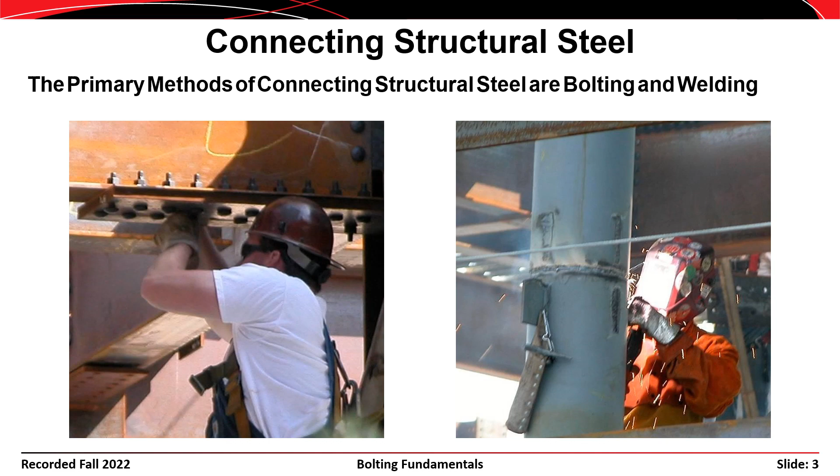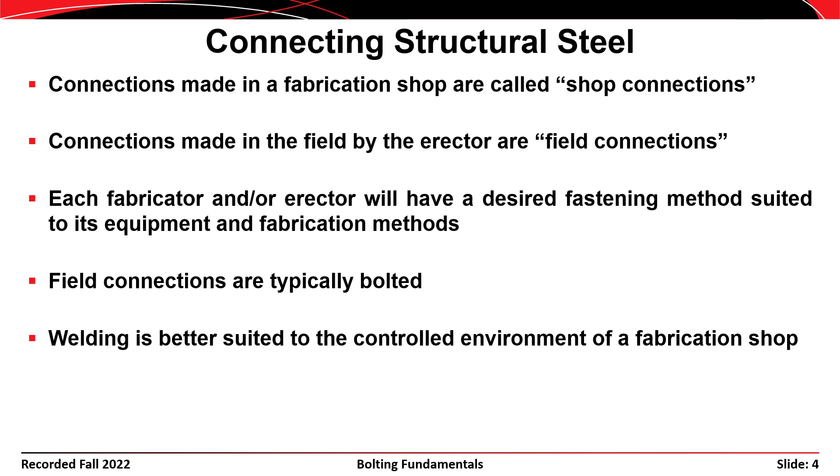Joints and connections made in a fabrication shop are called shop connections, whereas connections and joints made in the field by the erector are called field connections. Each fabricator and erector will have their own preferences for bolting or welding in the field or in the fabrication shop, but generally speaking, field connections are typically bolted and shop connections are often welded.

That's not to say you can't do it the other way around. In fact, welding is sometimes used in the field where bolting is either impractical or undesirable, and sometimes fabricators will do bolting in the shop even if welding is easier in that location.

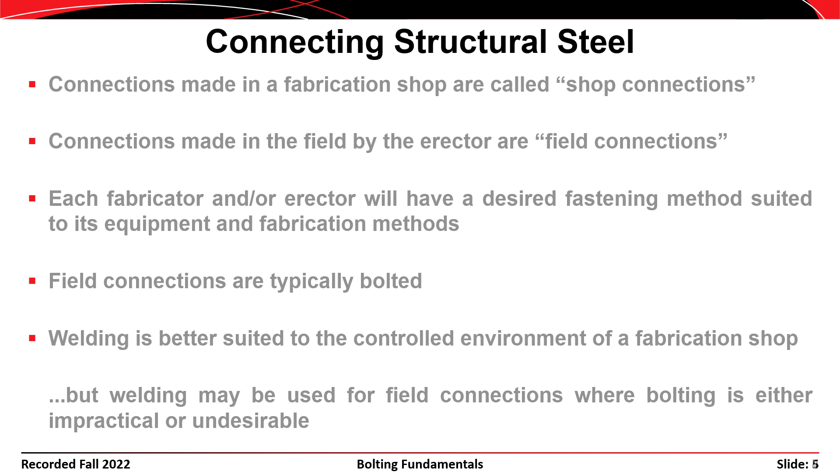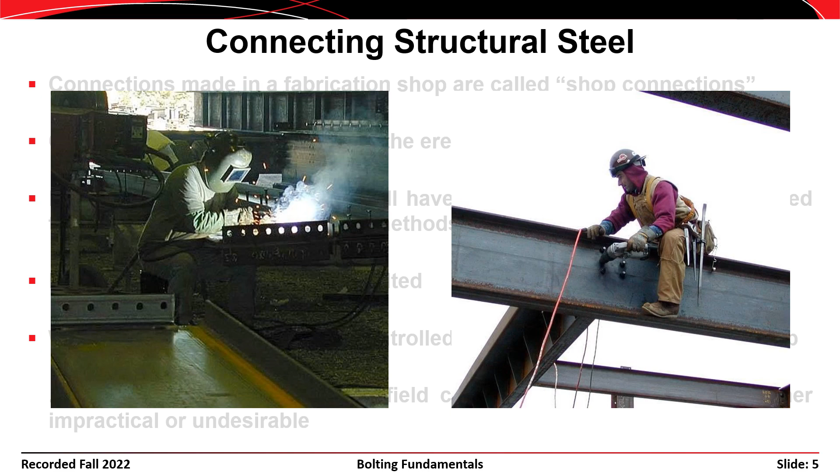As I said at the beginning, this presentation covers bolting, basically the installation of bolts and when and where washers are required and that sort of thing. Welding is covered in a separate presentation, and even failure modes associated with bolting are covered in a different presentation as well.

We're going to refer to the AISC specification, Chapter J, where appropriate, but there's a different specification that governs bolts and bolted joints. That's the Research Council on Structural Connections. They have a specification on structural joints using ASTM A325 and A490 bolts. The last edition of it was the 2014 edition.

It's included in your manual. There's a newer edition due to be released either in 2021 or 2022, and I'll make reference to that occasionally throughout this presentation.

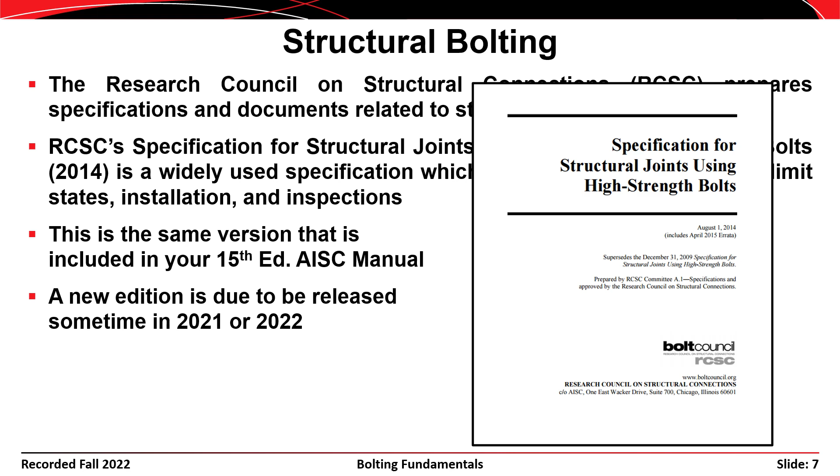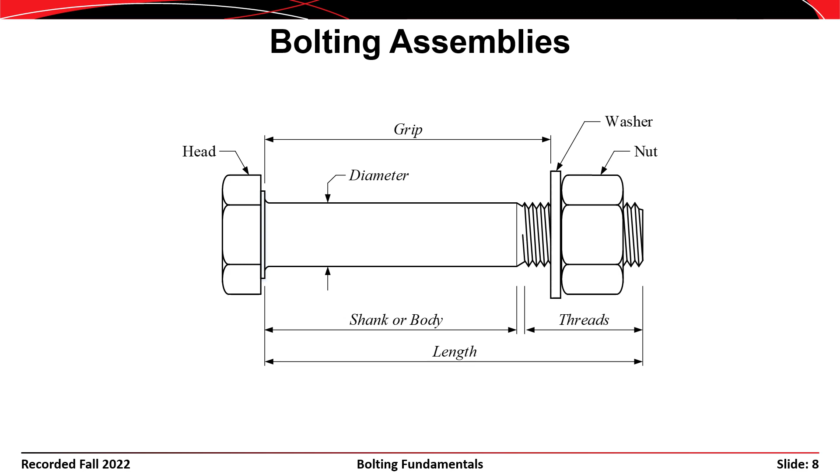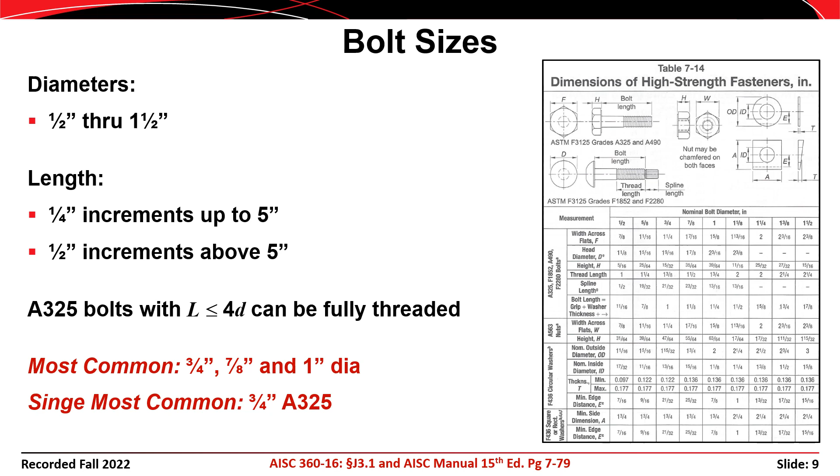If you look at the AISC specification, we have four groups of bolts available. The first is A307, commonly referred to as a low carbon steel bolt, with a tensile strength F sub U of 60 KSI. This is not commonly used for joining or connecting primary members, but more commonly used for secondary members or non-structural work like connecting railings and things of that nature.

We have group A bolts with a strength of F sub U equal to 120 KSI. We have group B bolts with a strength of 150 KSI, and finally group C bolts with a strength of 200 KSI.

Group A bolts are composed of F3125, grade A325, or grade F1852 bolts. These are the most common bolts used in building construction. Group B bolts are ASTM F3125, grade A490, or grade F2280. These are slightly less common, stronger, but cost just a little bit more.

The third group, Group C bolts, have a tensile strength of 200 KSI. They're relatively new to the construction industry in the U.S., and in theory they're available in larger diameters of an inch, inch and an eighth, and inch and a quarter, but currently they're not available in the United States.

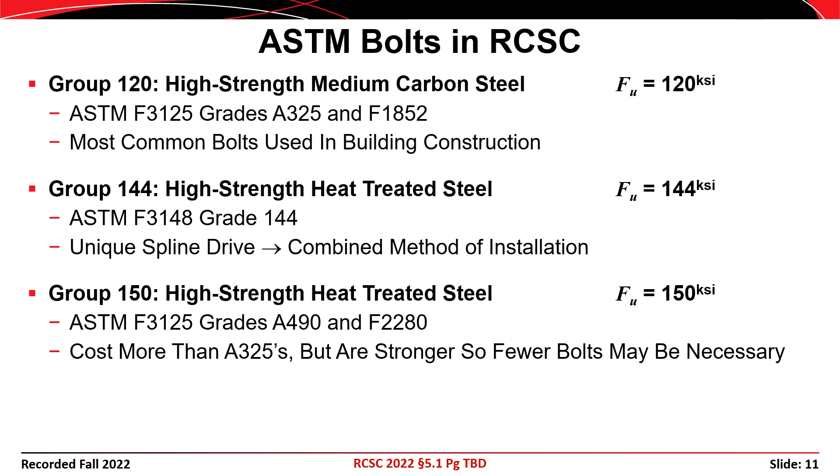If you look at the RCSC specification, the grouping of fasteners is a little different. We have Group 120 bolts instead of Group A bolts, but they're still composed of F3125 grade A325 and grade F1852. We have the Group 150 fasteners as well, composed of ASTM F3125 grade A490 or grade F2280 bolts. But there's another grade included in RCSC: Group 144 bolts, which are ASTM F3148 grade 144. They have a unique spline drive on the end and allow for the combined method of installation.

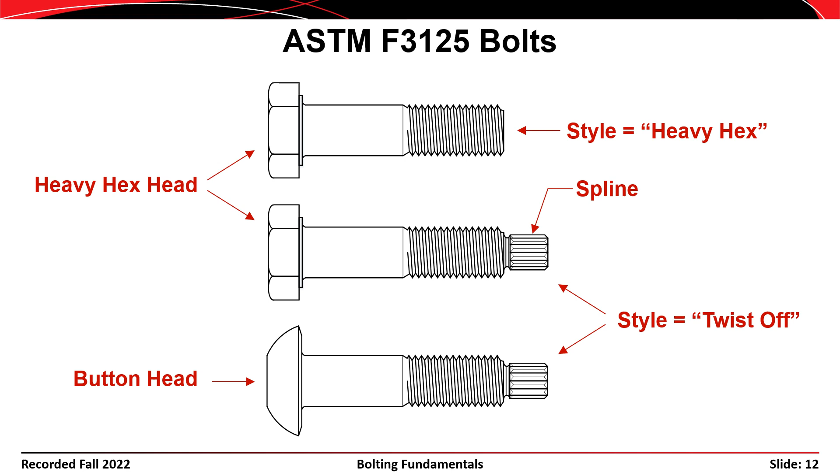The ASTM F3125 specification comes with 6 different grades of fasteners. There's the grade A325, a hex variety at 120 KSI, and the F1852, the twist-off or tension control variety of the 120 KSI bolt. For 150 KSI fasteners, the A490 is the heavy hex, and grade F2280 is the twist-off version. There are also 2 metric grades: grade A325M with tensile strength of 830 megapascals, and grade A490M with tensile strength of 1040 megapascals. Metric bolts aren't used very much in the United States though.

So these are referred to as T and A 144, or torque and angle bolts, at 144 KSI strength. The method of installation is a combined method where a special wrench grips the spline and turns the nut relative to it, achieving a snug tight condition using torque, and then a fully tensioned condition by rotating the nut an additional angle, hence the name torque and angle.

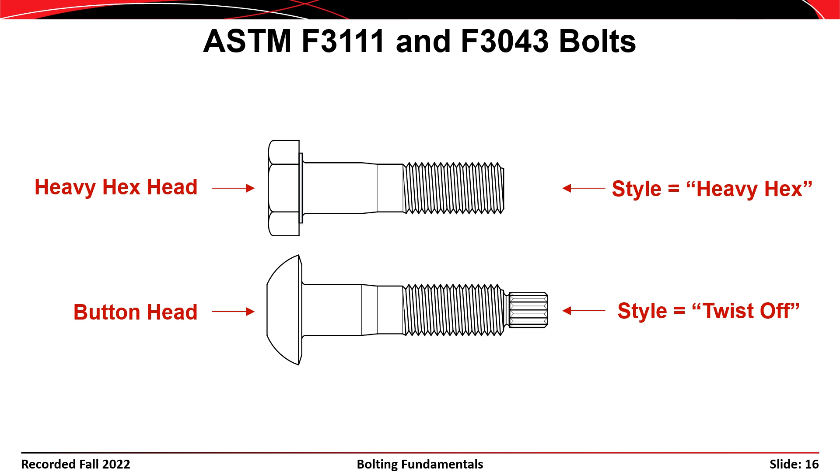These are the 200 KSI bolts, featuring a heavy hex variety, the F3111, and a twist-off variety, the F3043. You might also notice these bolts include a reduced shank that helps them achieve the higher strength without issues with lack of ductility.

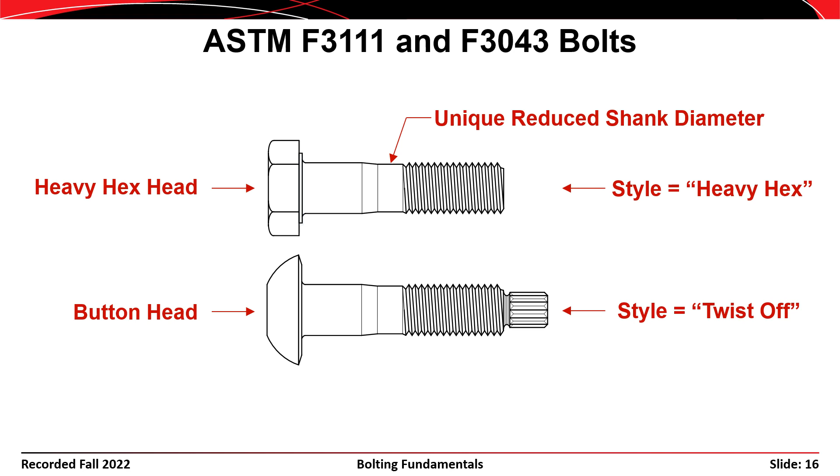These fasteners have a strength of 200 KSI. ASTM F3111 refers to the heavy hex style, and F3043 refers to the twist-off style. However, these bolts aren't available in the United States as of right now.

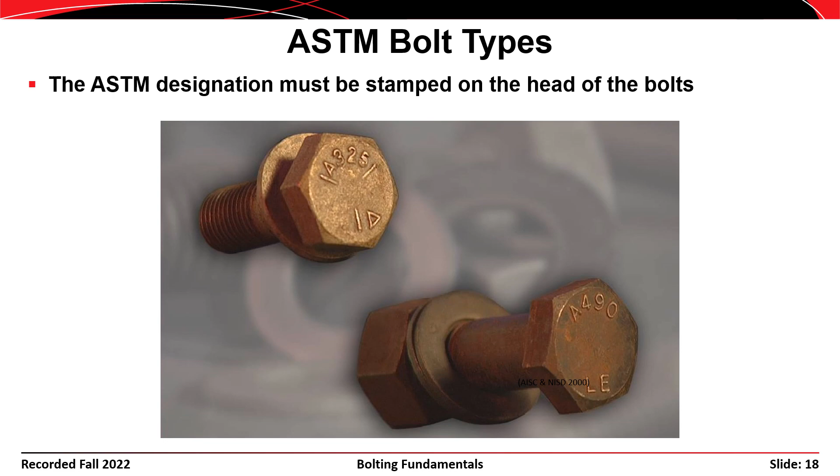Okay, in addition to the different types of fasteners, you can also look at different finishes that you have for the bolts. You can have a plain or galvanized. There are some other coatings as well, like a Dacromet coating and things of that nature. It's considered to be acceptable right now to galvanize A325s or F1852 bolts. I think it's going to be okay to galvanize Group 144 fasteners, but right now it's problematic to do galvanizing of A490s or F2280 bolts.

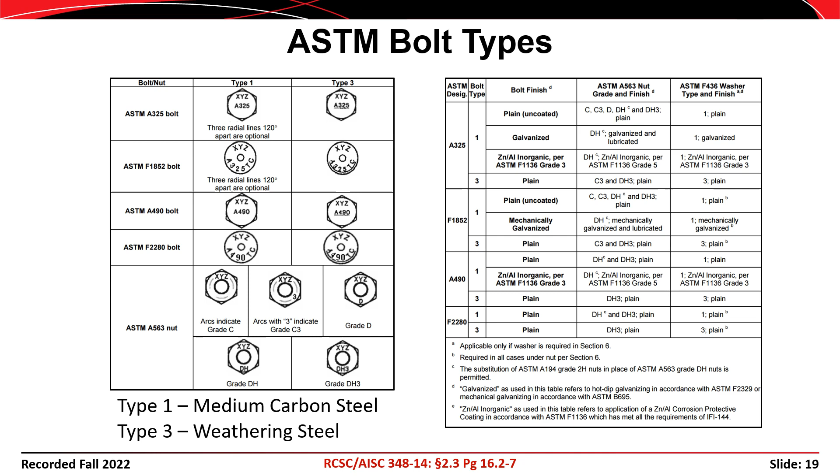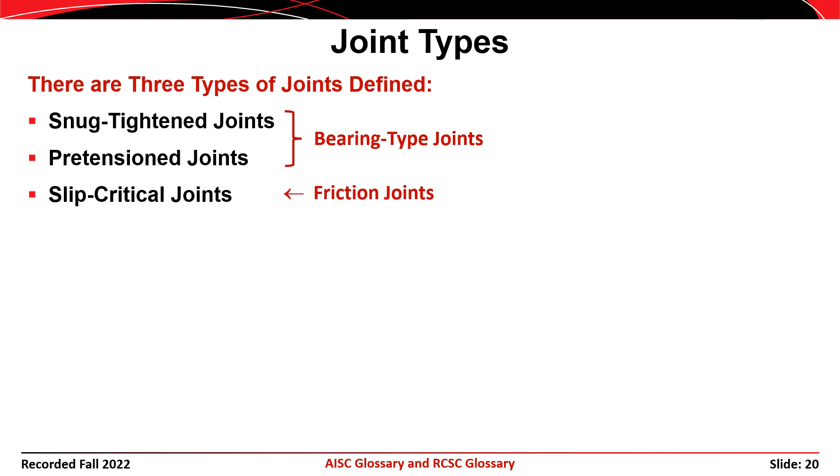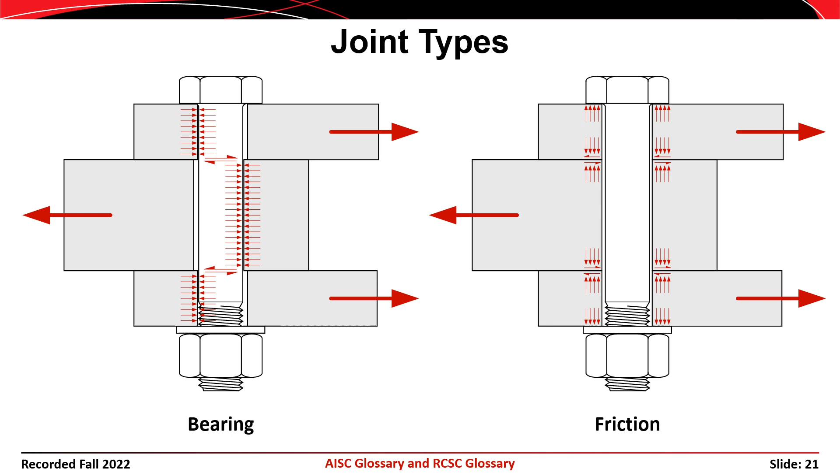Bearing type joints are defined more formally as a snug tightened or pretension joint with bolts that transfer shear loads and for which the design criteria are based upon the shear strength of the bolts and the bearing strength of the connected materials. Failure modes that one would consider for a bearing type joint include bolt tension or shear, bearing and tear out, block shear, tension, compression, or shear failures of the connecting elements, and similar types of failure modes.

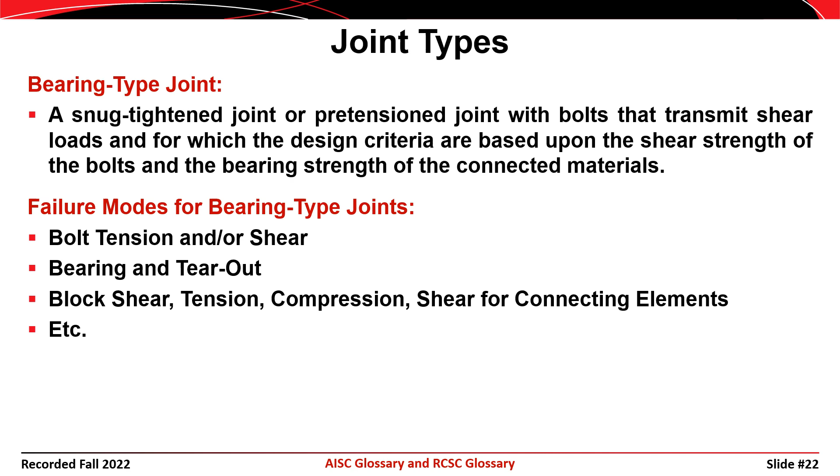A snug tightened joint is a joint designed as a bearing joint in which the bolting assemblies have been installed to the snug tight condition. The slip resistance of a snug tightened joint is basically expected to be 0. A pretension joint is a joint designed as a bearing joint in which the bolting assemblies have been installed to the fully tensioned condition. However, the slip strength of the joint need not be greater than the factored required strength of the joint.

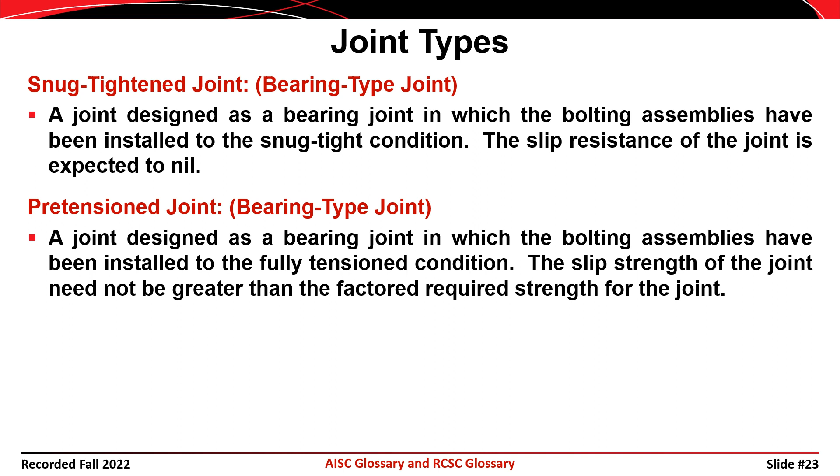In this case, the slip resistance of the joint is there basically as a serviceability issue for the joint or for the connection or for the structure. A slip critical joint is a joint that has been designed to transfer shear loads through friction. The slip strength of the joint must be greater than the factored required strength for the joint.

Washers are part of bolting assemblies, and they're used basically to distribute the force or the stress from the bolt over a larger area of the base metal. They also help to reduce gouging of the softer base metal during the tightening process, and they're in place sometimes to cover an oversized or slotted hole.

If you were to just take a nut or a bolt and tighten it directly against the softer A36 or A572 grade 50 base metal, you would end up gouging that material, and the bolt or nut material would end up galling the base metal. So to prevent that, you put a hardened washer in between them. The washers are a higher strength steel, but it's really the hardness of the washer that matters, because it prevents the bolting assembly components from digging into the base metal.

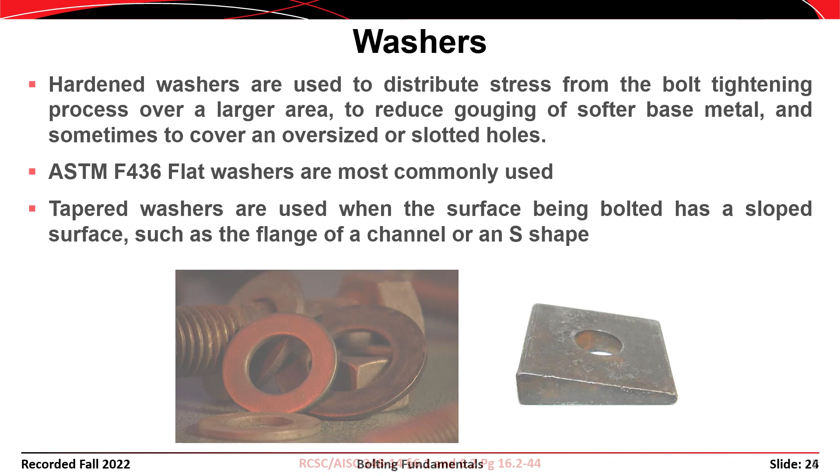Where and when washers are required can be a bit confusing, and you'll find some disparity between the RCSC specification and the AISC specification. In general, you want to put a washer under the turned element during the tightening process. So if the head is held and the nut is turned, you want a washer under the nut. If the nut is held but the head is turned, you want a washer under the head of the assembly.

More specifically, washers are required under both the head and the nut of A490 assemblies when used with base metal that has a strength less than 40 KSI. If you're using an F2280 assembly, you need a washer only under the nut. Remember, the A490 is a hex or heavy hex style, and the F2280 is the tension control or twist-off style bolt. Both of those are 150 KSI.

Washers are required under the head and nut of all F3111 assemblies, and required under the nut only for F3043 assemblies. Remember, the F3111 and F3043 assemblies are 200 KSI bolts. The F3111 is the heavy hex style, and the F3043 is the twist-off style.

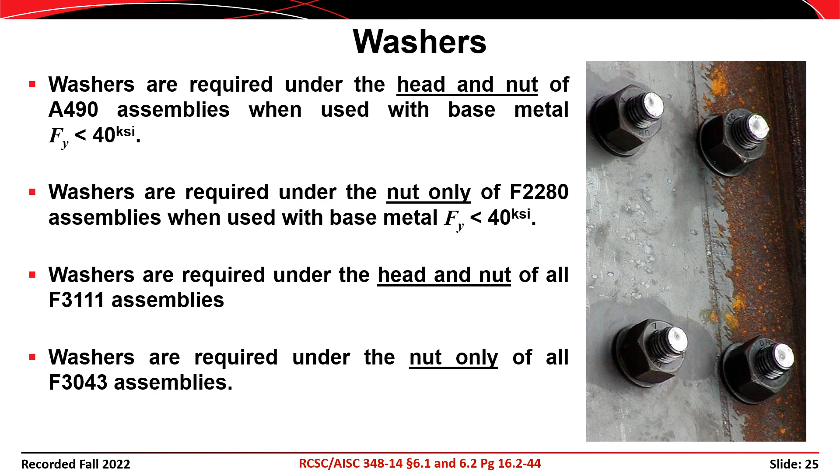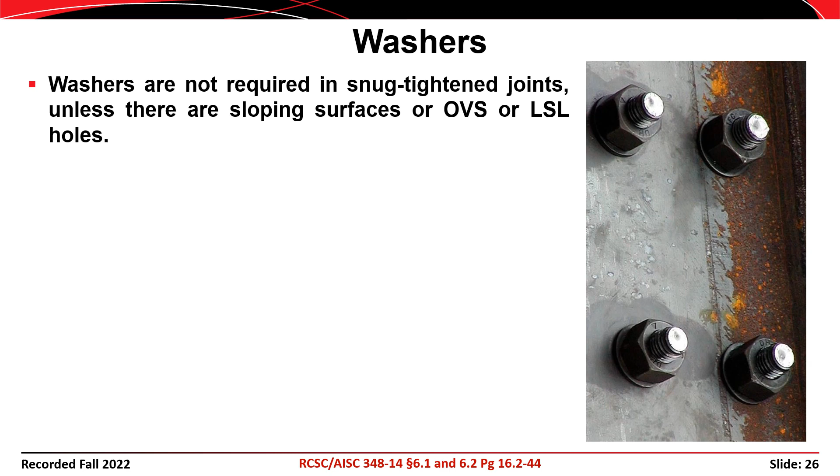Washers are not required when you have snug tightened joints, unless there are sloping surfaces where you'd use a tapered washer, or unless there's an oversize or long slotted hole. In that case, you need to provide a washer to cover the opening in the hole that might not be covered by the nut. We also have washers that are often required in pretensioned or slip critical joints, depending on the method of pretensioning.

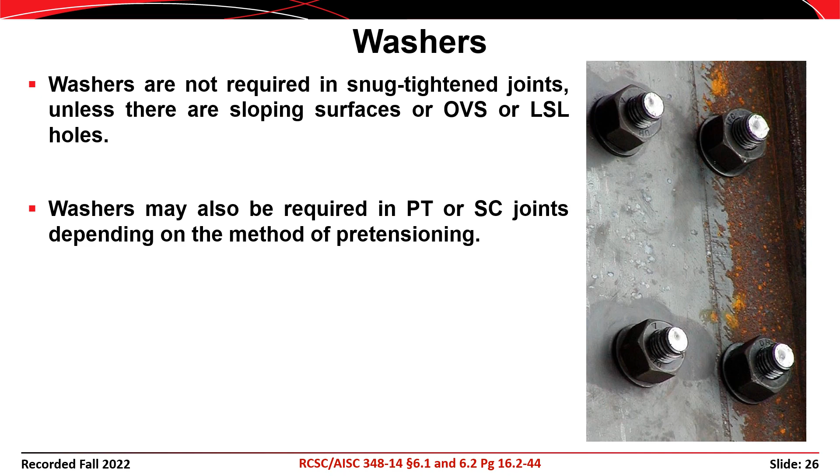Let's talk for a minute about the erection of steel structures and the implications it has on bolting. During hoisting, connectors - meaning the people actually doing the connecting - will install a minimum of 2 bolts per connection, and the remaining bolts are installed and tensioned usually later on after the structure is plumbed.

So you have a raising gang of the erection crew, and they'll come in with the crane and use that to set members, putting at least 2 bolts in. In theory they're required to put washers and nuts on those bolts, and at least snug them up before they release the crane. Then they usually have a different bolting crew that comes in afterward to put the remaining bolts in, and if pretensioning is required, to actually do that pretensioning.

This is an interesting case. There have been several failures in the United States because connectors or the raising gang don't put in enough bolts during the erection process. In fact, there was a post office failure in Chicago where a beam fell from a building under construction, and it was found that the raising gang put 2 bolts in but didn't put nuts on some of those bolts, which led to the failure.

In another case here in Cincinnati, there was a failure during construction of the downtown casino. As I understand it, that failure resulted because they poured a concrete slab on top of a beam before the bolting crew came in and installed all the bolts in the connections supporting that beam, which was supporting the concrete slab. So they got the order of operations mixed up, and it led to a failure.

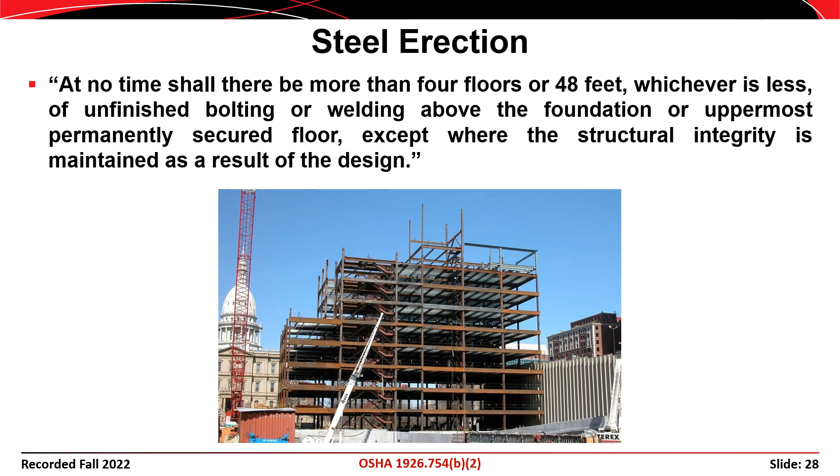Bolts on a typical steel job site are installed either to the snug tight condition or to the fully tensioned condition. Bolts are permitted to be installed only to snug tight when used in bearing type connections, or when you have group A bolts used in joints subjected to tension or combined shear and tension, where loosening or fatigue due to vibrations or load fluctuations are not a consideration.

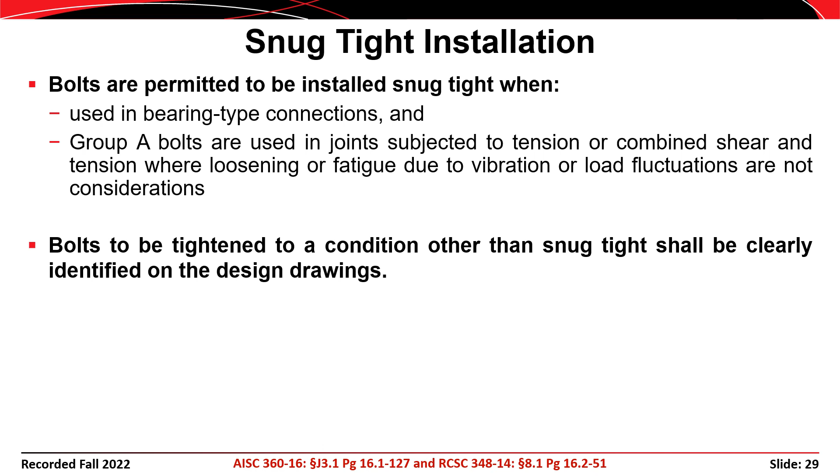Bolts to be tightened to a condition other than snug tight have to be clearly identified on the design drawings. So if nothing is called out on the design drawings, it's assumed by the contractor that those bolts will only be snug tight.

AISC 2016 says that the snug tight condition is defined in the RCSC specification. And if we go to the RCSC specification, it says that the snug tight condition is the tightness attained with a few impacts of an impact wrench, or the full effort of an iron worker using an ordinary spud wrench to bring the plies into firm contact.

It's interesting because the definition of snug tight is one of those things that seems to change every time there's a new issue or release of the specifications, but this has generally been the case for quite a while - basically the full effort of an iron worker using an ordinary hand wrench, or the few impacts of an impact wrench. The problem with this is that not all iron workers are created equal.

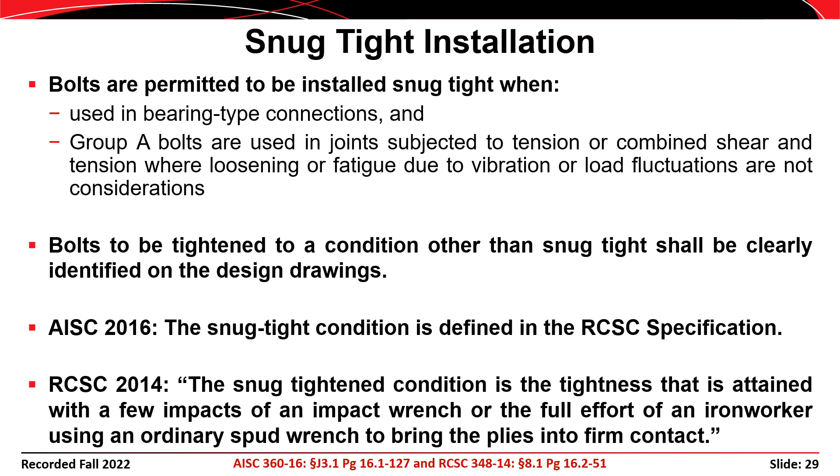So defining the full effort of an iron worker with an ordinary wrench, in some cases you get a bit more effort from one iron worker than you might from another.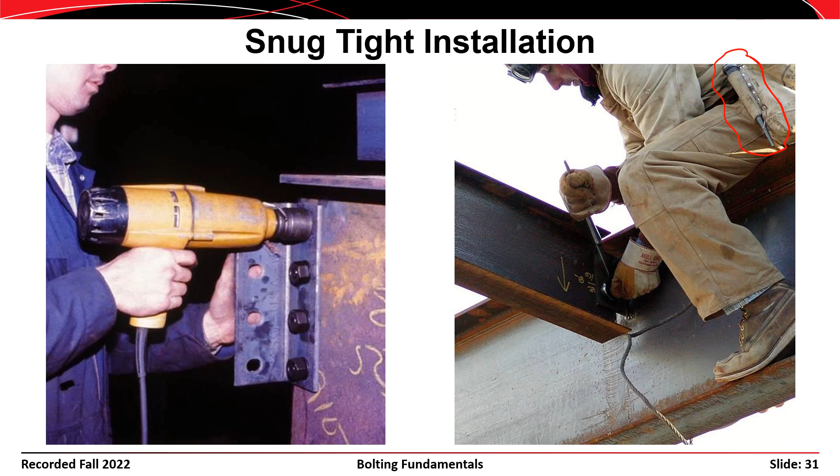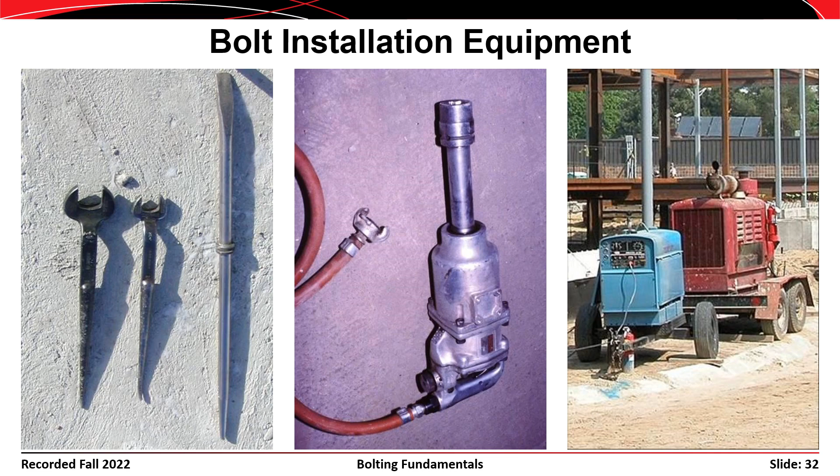You have the 120 KSI bolts group A, the 150 KSI group B bolts, and then the 200 KSI group C bolts. So the minimum pretension is basically 70% of the tensile strength of the bolts, but it's the tensile strength calculated using the effective area of the fastener and not the gross area of the fastener - so there's a little bit of magic in the calculations, if you will.

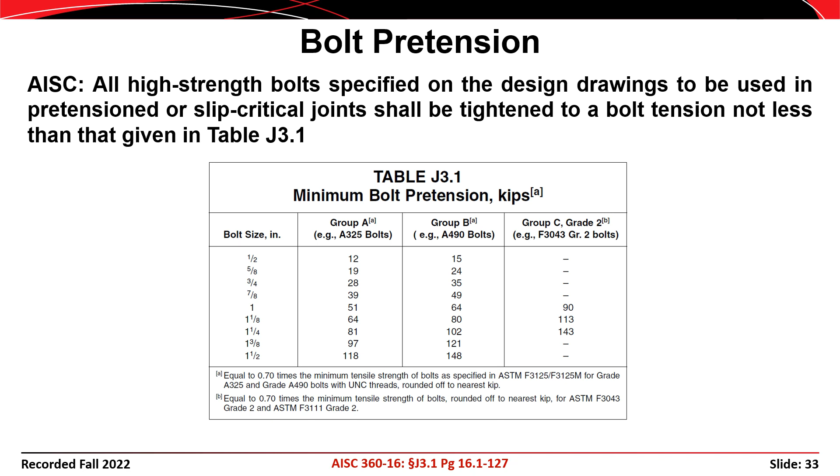Grade 144 bolts, the torque and angle fasteners, have the same minimum specified pretension as the A490s or F2280s. RCSC doesn't include the F3111s or F3043s, the 200 KSI bolts.

So in the end, for pretensioned and slip critical connections, we need to provide a minimum pretension in the fasteners. In order to do that, we need to use one of the methods included in the RCSC specification. AISC just provides a reference to RCSC with respect to methods of bolt installation, and it's in Chapter 8 of the RCSC specification.

The methods included are turn of nut pretensioning, calibrated wrench pretensioning, twist off tension control bolt pretensioning, direct tension indicator pretensioning, and coming in the next edition of the specification is a new method called the combined method, where we combine a method of snug tight using a prescribed torque and then a fully tensioned condition using an angle of rotation beyond snug tight.

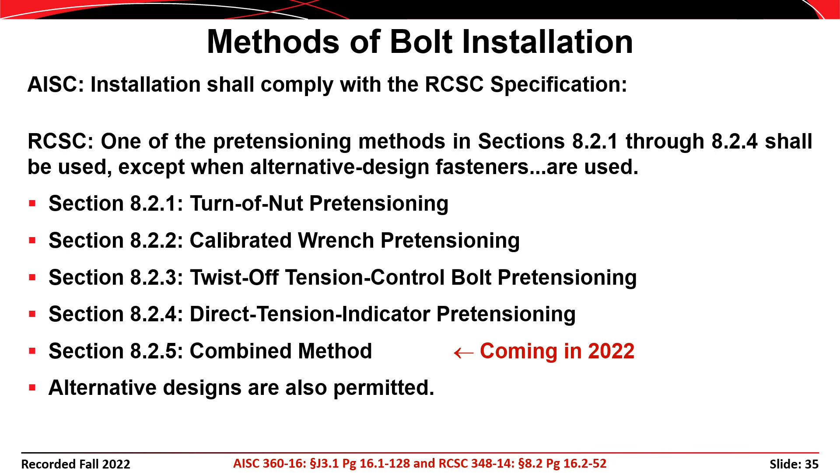There's also a provision for alternative designs, so if you find a fastener that doesn't conform with one of these methods, you're allowed to use it, but there's some prescriptive language that talks about how to make sure you get enough pretension in those alternative bolt designs.

So we'll talk about turn of nut pretensioning first, and the basic premise here is that you rotate the nut of the fastener assembly relative to the bolt, and in so doing you stretch the bolt by some amount, and that change in length of the fastener corresponds to a strain, which then corresponds to a stress, which then corresponds to a force.

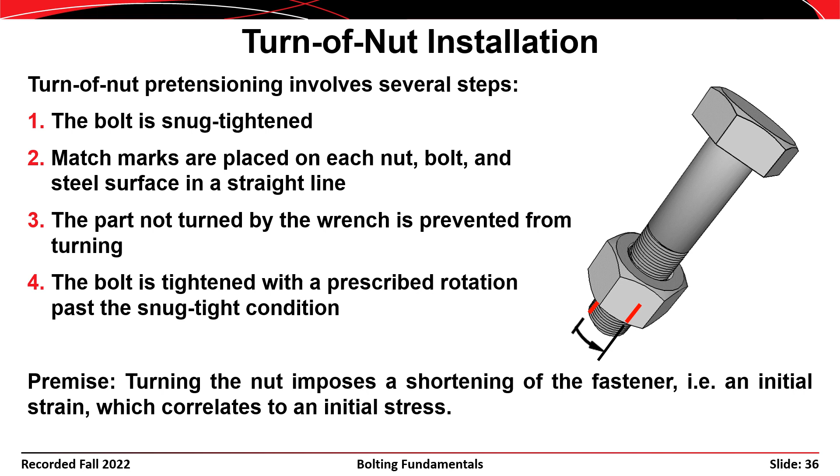So the basic method is that you snug tighten your bolts, then you put a match mark on the nut relative to the bolt, and then you rotate the nut by an additional angle that will shorten the bolt by a length appropriate to get the minimum prescribed tension in that fastener. The illustration on this slide shows the two match marks in red, and then the nut has been rotated by a prescribed angle in order to provide the minimum pretension.

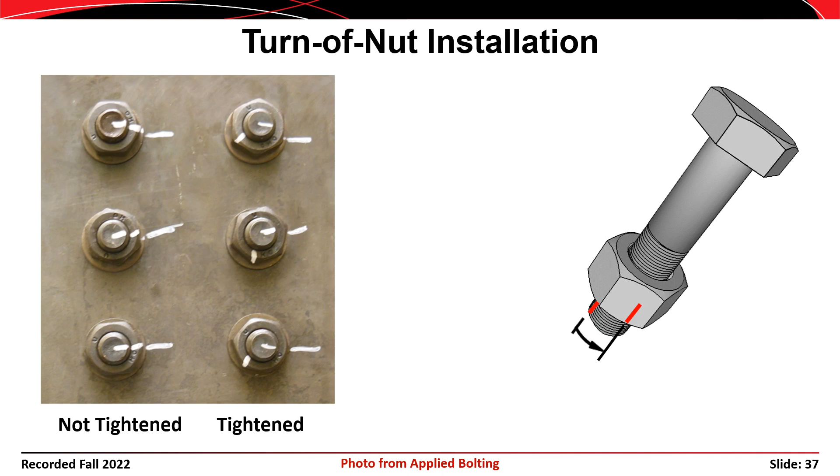For a medium length bolt, it's a half of a turn, and for a longer bolt, it's 2/3 of a turn. And then you have other provisions for the case where the head of the bolt and the nut are being borne against two different surfaces that aren't parallel to each other.

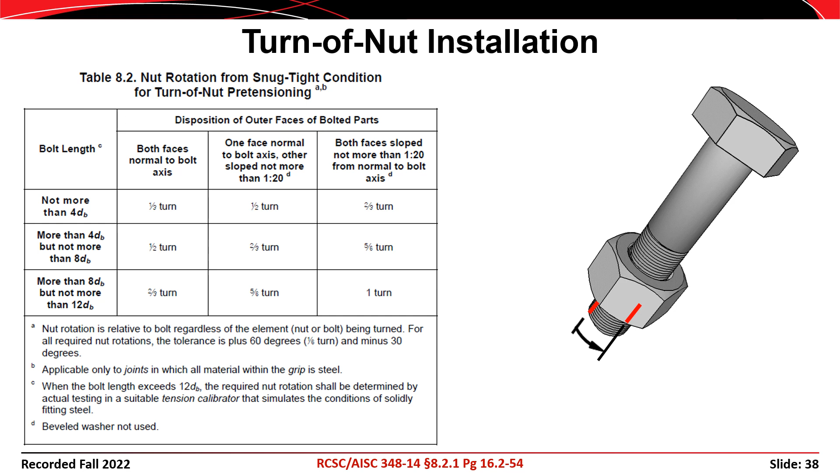So the next method that we'll talk about is the calibrated wrench method, and this is most similar to what you might think about if you're used to working on automobiles where you have a prescribed torque that needs to be applied to a nut, say when installing a valve cover, or maybe installing a tire where you have to provide, say, 30 foot-pounds of torque to the nut.

So this method of installation is based on the idea that there's a relationship between the torque that's applied and the amount of force that's developed in the fastener. And that relationship is shown here, where T, the torque applied to the nut or the bolt, is equal to K times the diameter times the force.

And K is the nut factor, and it depends mostly on whether there's lubrication between the threads of the bolt and the threads of the nut. In a case where you have relatively high lubrication, you end up with a relatively low amount of torque required to get a prescribed force in the bolt. If you have dry threads or threads with high friction, you end up with a higher nut factor and require a larger torque to get to the same force.

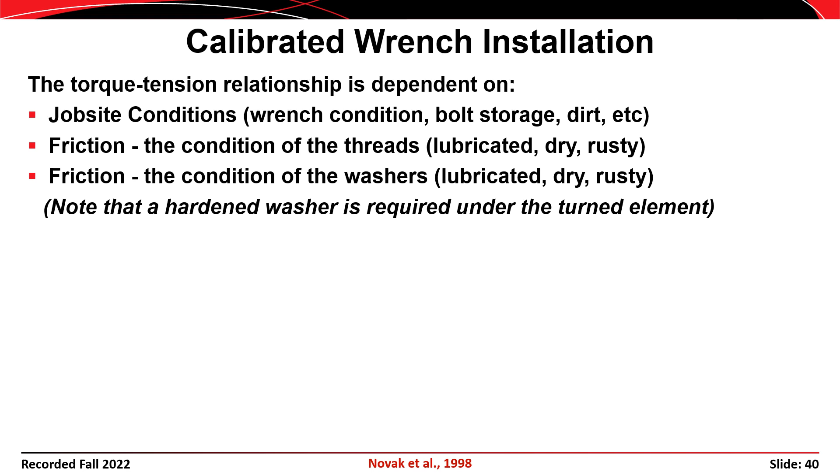The calibrated wrench method is dependent on a lot of the job site conditions. You have to make sure that your wrench is calibrated correctly so that if it says you're reaching a given torque, that you're actually getting that same torque. And you need to make sure that the threads of the fastener assembly are in good condition. You can't leave the bolts out to get rusty or dirty. So friction between the threads affects the installation process, and even friction on the faces of the nut, the head of the bolt, and the washers also affects the installation method.

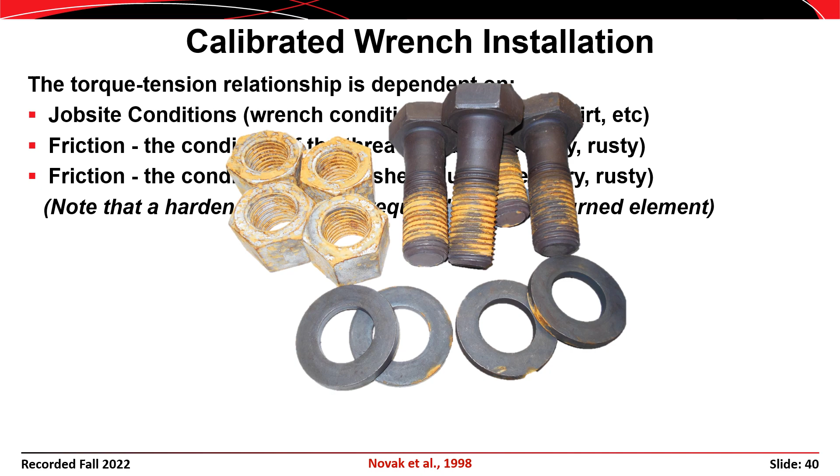This shows an example of bolts that were stored poorly. You have some rust that has developed between the threads of the fastener and on the inside of the nut. This would probably affect the calibrated wrench method quite a bit, and you might not be able to achieve the minimum specified pretensions with fasteners that look like this.

If we look at the nut factors for a 1-inch diameter A490 bolt, taking that bolt directly out of the keg or can that it was shipped in, we had a nut factor of about 0.179. If we apply some stick wax to it, then that nut factor goes to 0.275. The premise there is that the bolt was removed from the keg or package it was shipped in, the lubrication dried off or evaporated, and then we tried to lubricate it again, but we weren't able to get the same nut factor that we got directly out of the package. And if you look at the nut factor for rusty fasteners, it goes all the way up to 0.389. So basically you would need between 2 and 3 times as much torque to get the same pretension in bolts that were rusty compared to bolts coming directly out of the shipping package.

That's illustrated here.

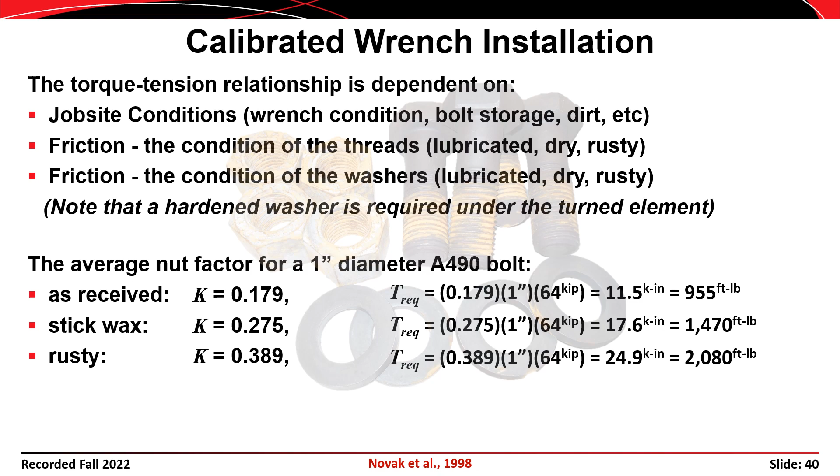The third method we'll talk about is twist-off or tension control bolt installation. Both the F1852s and the F2280s are twist-off tension control bolts. Also, the F3043s are tension control bolts, 200 KSI.

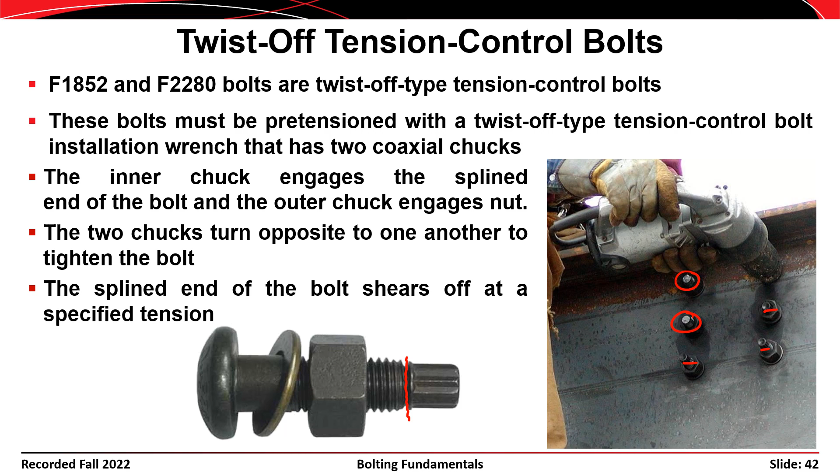Over here on the right, you can see the wrench. These two fasteners here have been twisted off, so you can see the spline is missing. These three fasteners here have not yet been tightened. This illustrates the method that the wrench uses. The wrench has two counter-rotating chucks: the inner chuck that grips the spline, and the outer chuck that grips the nut.

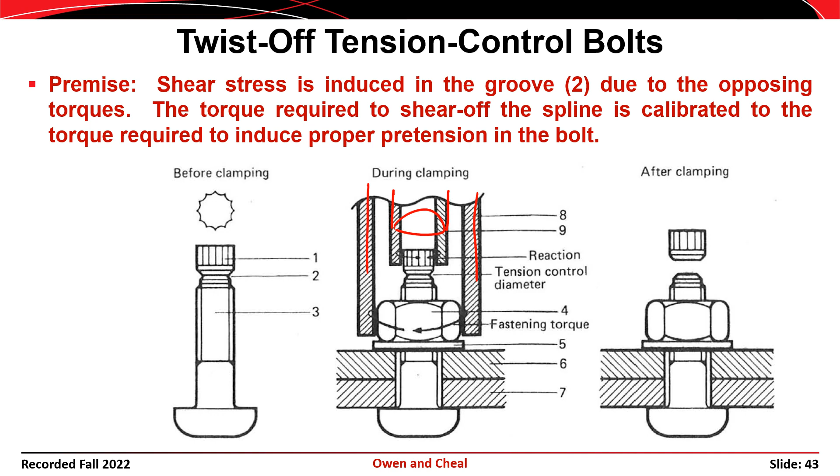Okay, TC bolts are often button-head or round-headed fasteners because they can be tightened from one side. You don't have to have a wrench on the head of the fastener to hold it from rotating.

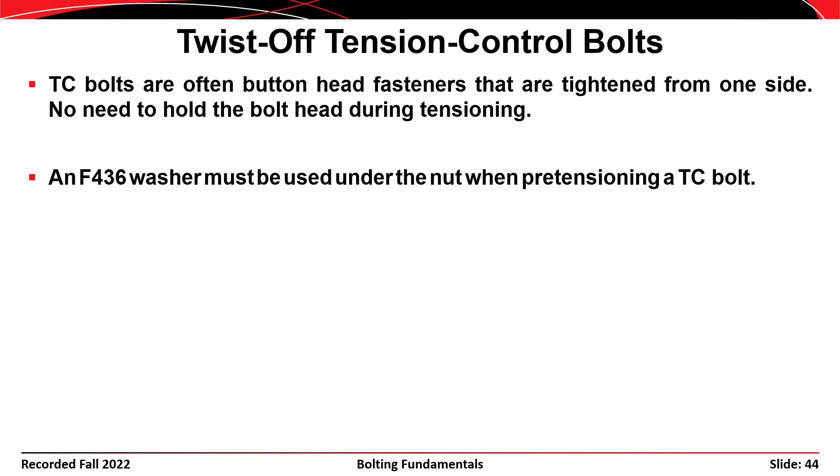An F436 washer has to be used under the nut when pretensioning a TC bolt in order to prevent the nut from gouging into the base material, which would affect the amount of torque going into the assembly.

TC bolts are susceptible to thread condition, so typically they're shipped as assemblies. You have a bolt, nut, and washer shipped together, as opposed to some hex assemblies where you can get the bolt, nut, and washer out of separate packages. I think more or less most fasteners nowadays are shipped as assemblies, but that's not strictly the case.

In some cases it may be necessary to pretension a TC bolt without twisting off the spline. Maybe you can't get a regular tension control wrench on the bolt, so you can still use a conventional wrench or a torque wrench to install the bolt.

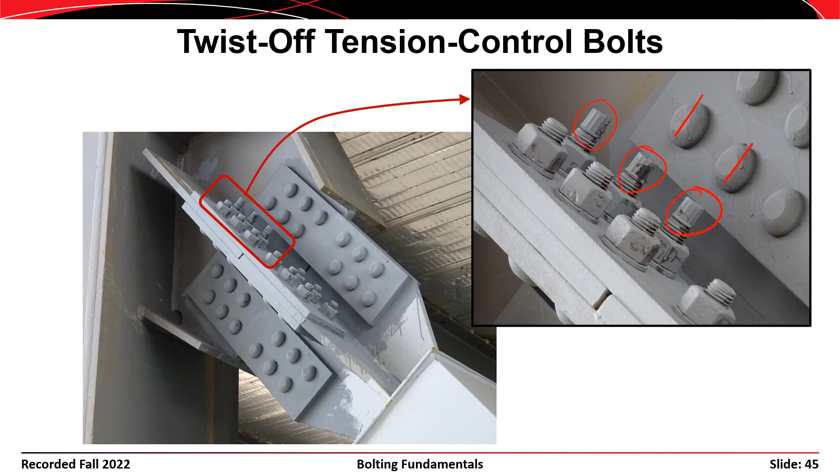Okay, the next method of installation that we'll discuss is a direct tension indicating washer, or DTI, direct tension indicator.

These are washers that conform to ASTM F959, and they basically have protrusions or dimples on the face of the washer. The premise is that as the bolt is tightened, those protrusions will squash out, squish down, or be depressed. When you're no longer able to fit a feeler gauge in between those dimples, the bolt is said to be tight enough so that minimum pretension is achieved.

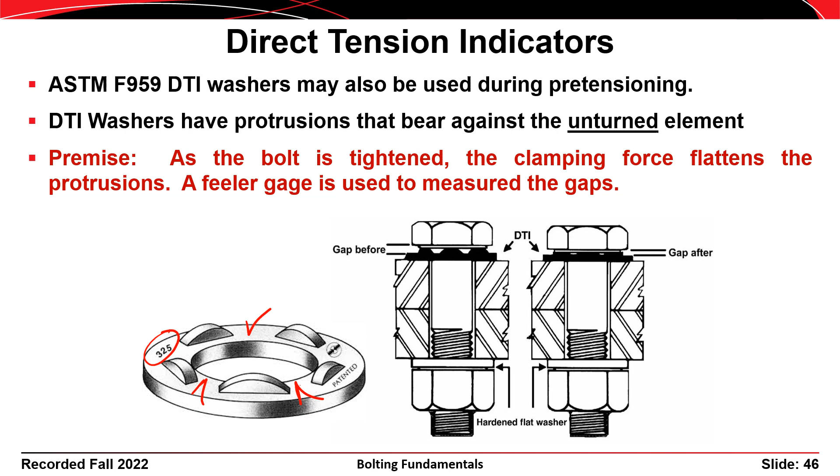Now these washers are calibrated to the specific bolt you're using. You can see this one says A325 on it, so it has a sufficient number of dimples to achieve minimum pretension for an A325 fastener. But you couldn't use that with an A490, for example. So you have to look at the face of the washer to make sure you're using the appropriate washer for the grade of fastener being installed.

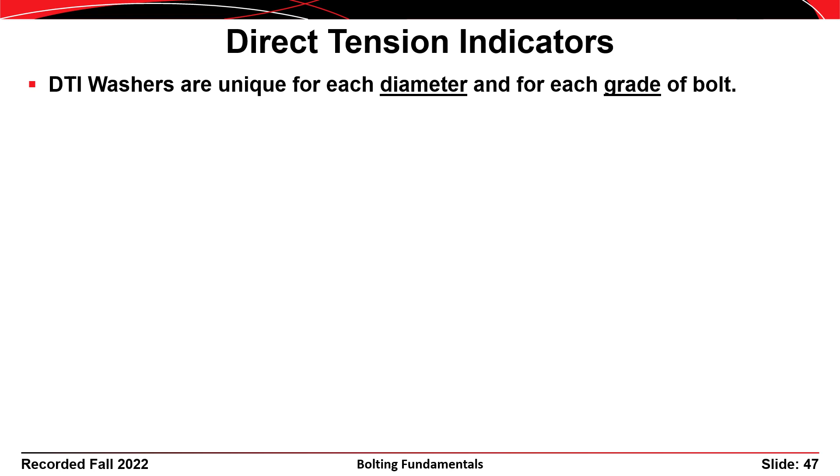The location of the DTI washer with respect to the turned element is critical when installing assemblies using the DTI method. The idea is that you don't want the turned element of the assembly directly adjacent to the protrusions on the direct tension indicator. If you're turning a nut against those protrusions, instead of squishing them down or compressing them, you might actually grind them off, and you might not achieve minimum pretension even though you have a sufficient number of refusals of the feeler gauge.

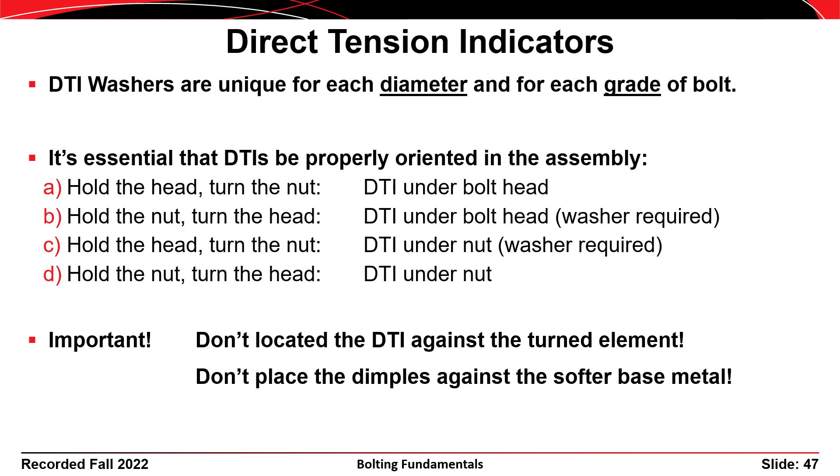This slide illustrates the correct location for the direct tension indicator given different configurations of installation. In case A, the DTI is under the bolt head and the nut is turned, so that's sufficient. In case C, the DTI is under the nut with the nut being turned, so in this case you have to have a second hardened washer so that the nut isn't bearing directly on the protrusions and being turned against them.

Case B shows a DTI under the bolt head where the head of the bolt is being turned. In that case, you would need a second F436 washer so that the head of the bolt isn't being turned directly against the protrusions. Finally, in the case on the right, you have a DTI under the nut, and the head of the bolt is turned, so having the protrusions bear directly against the nut is acceptable. Note in all four of these cases that the protrusions are not bearing against the base metal—they bear against the hardened material of either the nut, the head of the bolt, or another F436 washer.

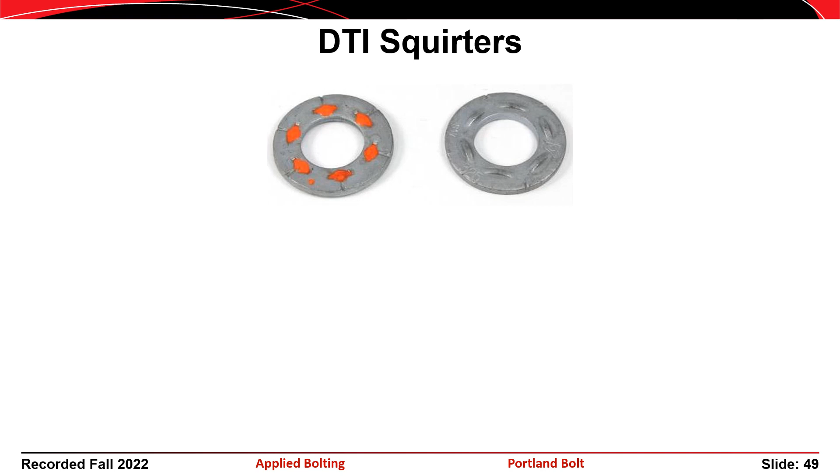Okay, there's a variant of the DTI washers called squirters. The idea is that if you look at the back side of the washer, there's an indentation behind each of the protrusions. It can be somewhat tedious to have to check the feeler gauge of a regular DTI all the time, so the idea of the squirter is that you fill that indentation with some type of paint, or I think it's a plastic silicone, and when the protrusions are squashed out or depressed, that paint squirts out the side of the washer. That's an indication that you can use your feeler gauge at that point to check if all the dimples are depressed enough that minimum pretension is achieved. These images show what it looks like when that paint or silicone actually squirts out.

The fact that the paint has squirted out isn't an indication that the bolt is tight. It's just an indication that you can then use your feeler gauge to check to make sure that gap is small enough that the bolt has actually been tightened.

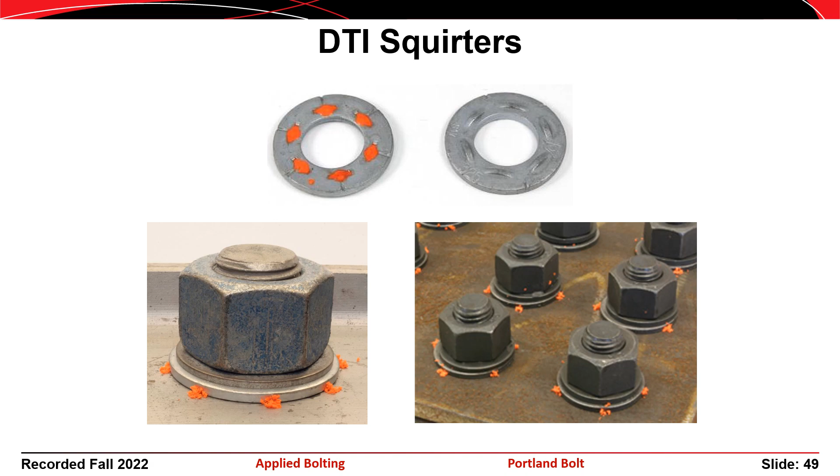The last method we'll talk about is the combined method of installation. This isn't in the 2014 edition of the RCSC specification, but will be coming into the 2022 edition. With the combined method, you achieve a given snug tight condition using a prescribed torque, found in the RCSC specifications in the 2022 edition. You apply that torque to the bolt first to get to a snug tight condition, and then you use an angle beyond snug tight in order to achieve full tensioning.

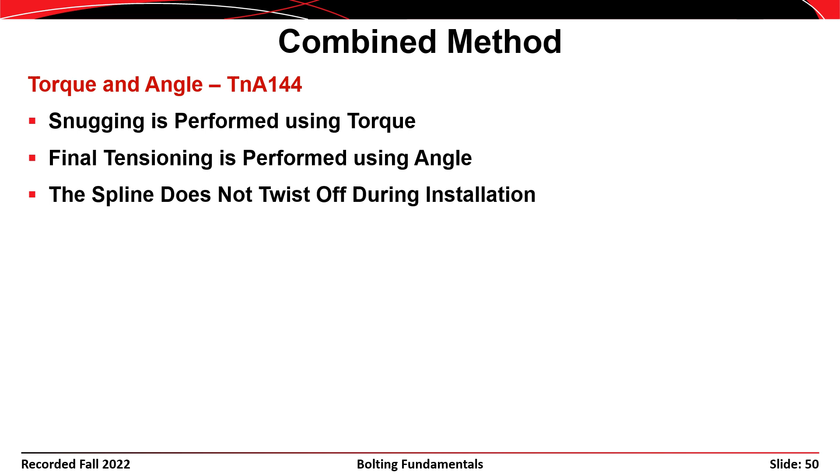With a torque and angle installation, you use a special wrench that's able to measure both torque and angle. You basically put it in torque mode to get to the snug tight condition, then switch the wrench from torque mode to angle mode to achieve the final tensioning. But in the end, the spline of the group 144 bolt does not twist off from the end of the bolt.

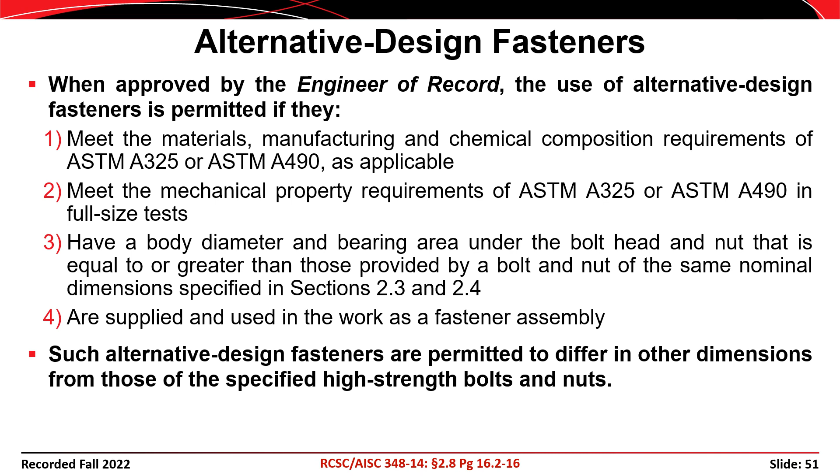Alternative design fasteners are permitted as well. I won't go into too much detail about these, but basically you have to come up with an installation method that assures the engineer of record that these bolts are going to achieve the pretension needed for them to function properly in pretensioned or slip critical joints.

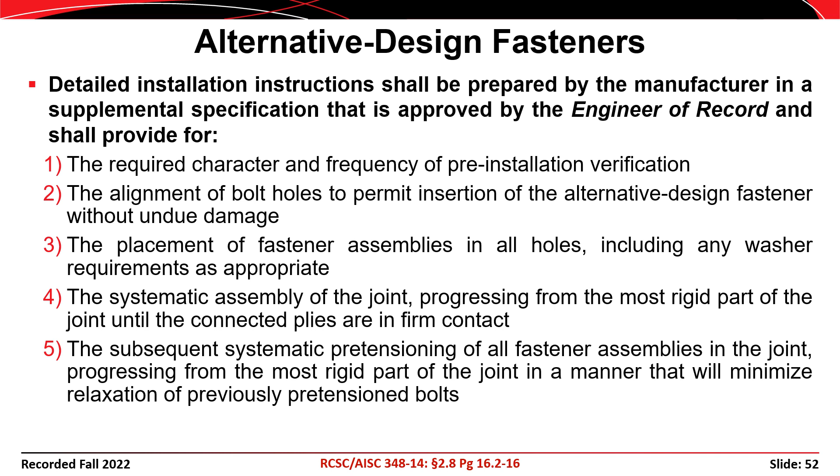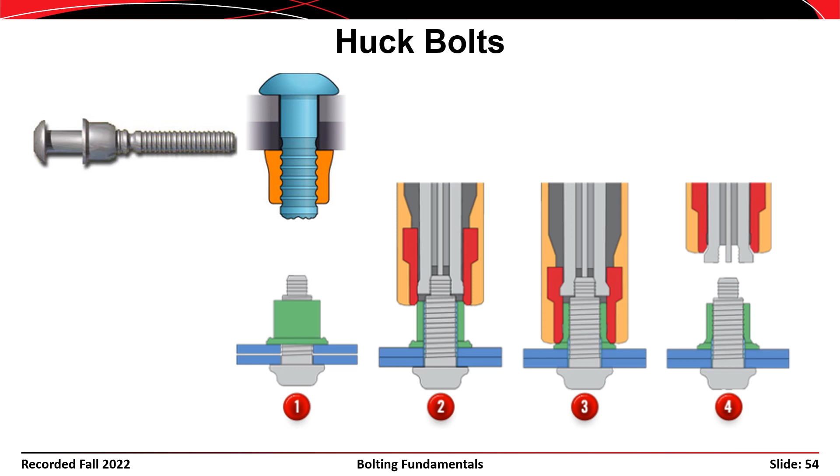Here's an example of an alternative design fastener: Huck bolts. These have been on the market for quite a while. They're similar in some respects to a rivet as opposed to a bolt, in that the grooves around it are actually annular instead of helical. A special wrench is used to provide pretension to the bolt, and then the outer chuck, shown in green on this slide, is actually deformed around those annular grooves to keep pretension in the fastener after the tightening device is removed.

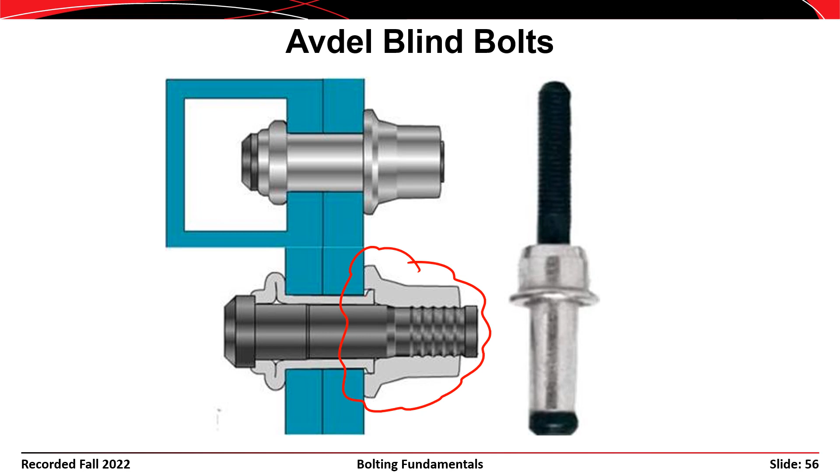Regardless of which installation method is used, pre-installation verification before the bolts are installed is required. This PIV testing is there to provide a means of ensuring that non-conforming bolting assemblies are identified before they're put into the structure.

Maybe you have bolts that don't have enough lubricant on the threads and won't meet minimum required pretensions. Or maybe there's a wrench or tool that hasn't been certified—somebody dropped a torque wrench and it no longer reads correctly. It's also there to make sure bolting crews know the proper installation method, giving them a dress rehearsal for installing the bolts using the appropriate method.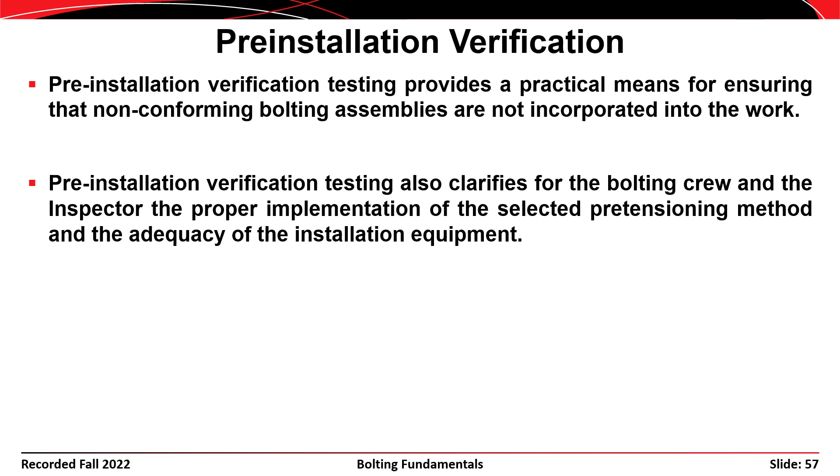We looked at the Skidmore Wilhelm torque tension tester under calibrated wrench, but it's used for all of the different installation methods during pre-installation verification testing. Basically, it's a donut-shaped load cell with hydraulic oil in it. The bolt is installed from the rear, the nut is installed on the front, and then you tighten the bolt using the method indicated and make sure that the minimum required pretension is achieved.

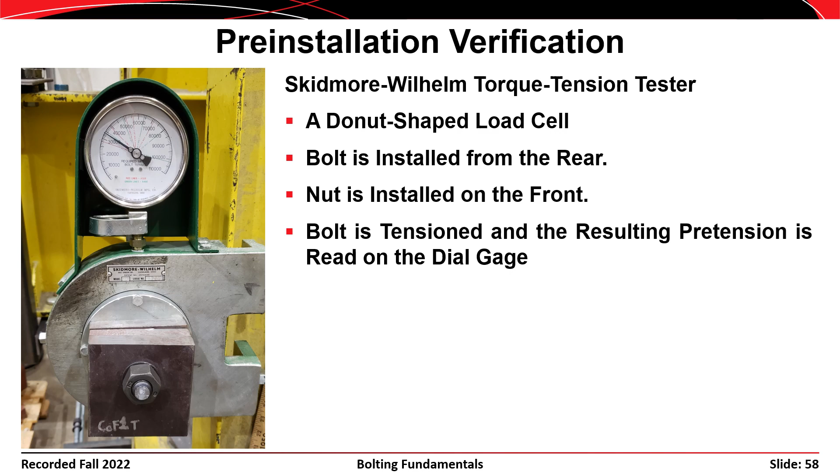Pre-installation verification testing is critical for several reasons: to make sure the bolting assembly is adequate, including lubrication; to make sure you're using the proper method among several different installation methods; to make sure it's being conducted properly; to make sure the tools are properly calibrated and that we have other suitable equipment. It also provides an arbitration torque in the eventuality of some sort of dispute based on the bolt installation.

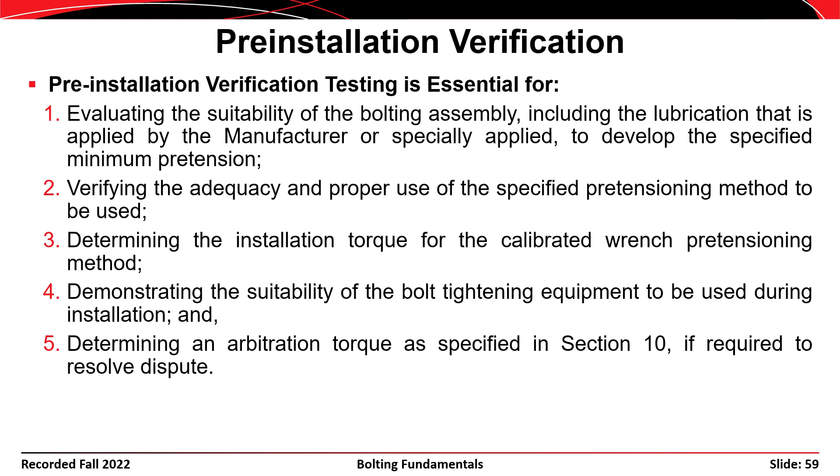PIV testing is supposed to be conducted on the construction site, prior to placing any of the bolting assemblies in the work. It's supposed to be conducted using bolting assemblies that are basically the same ones used on the job site. If you go to a different size or even a different lot of fasteners, you're supposed to perform PIV testing for each size and each manufacturer lot, using a sample of not fewer than 3 bolting assemblies to make sure it works all 3 times.

Installation inspection is required on most job sites, in addition to what the erector might have in place. Tests and inspections are often specified by the engineer of record and might be specified in local building codes as well. Snug tightened joints often require visual inspection to ensure firm contact between the plies of the joint and proper washer use. Pretension joints often require pre-installation verification and observation of bolt installation in the finished joint. Slip critical joints sometimes require, above the inspection for pretension joints, that faying surfaces be inspected prior to the joint being assembled.

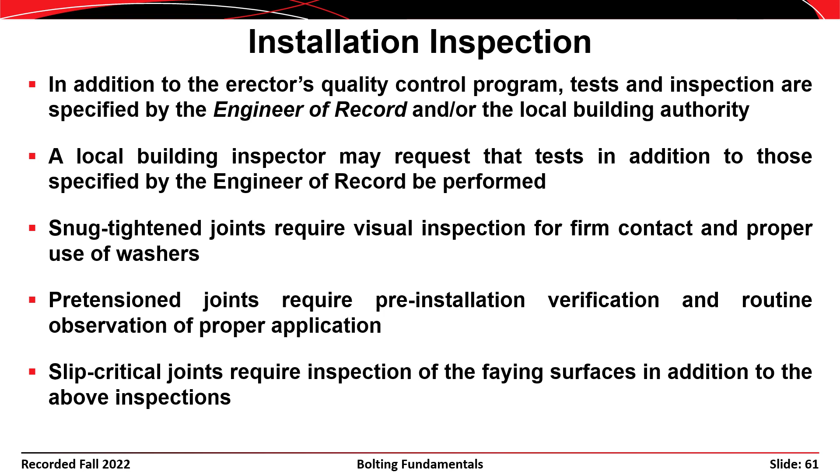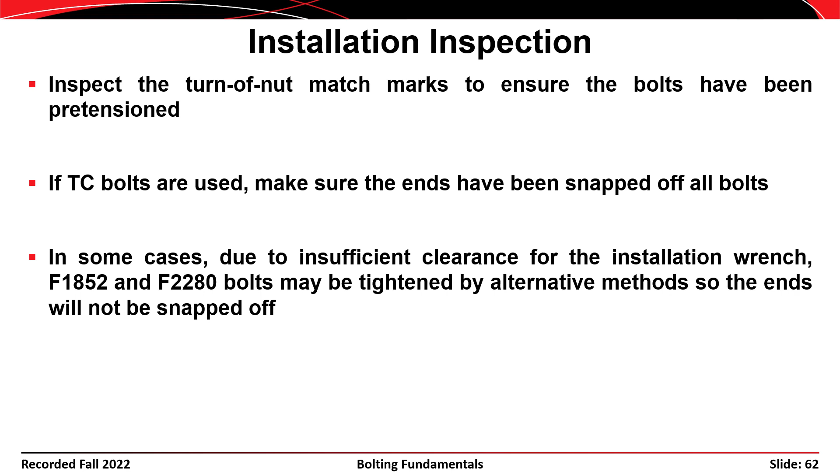Generally, an inspector would look for match marks for turn-of-nut installation, and would check to see if the splines of TC bolts or twist-off bolts have all been snapped off. They might observe a bolting crew installing bolts using the combined method or the calibrated wrench method. If DTIs are used, they'll check that all of the protrusions have been depressed and that feeler gauges can't be inserted between them. Bear in mind that in some cases with twist-off bolts, it might not be possible to fit a wrench on to snap off the splines, so alternative methods can be used to install those bolts even if splines remain on the ends.

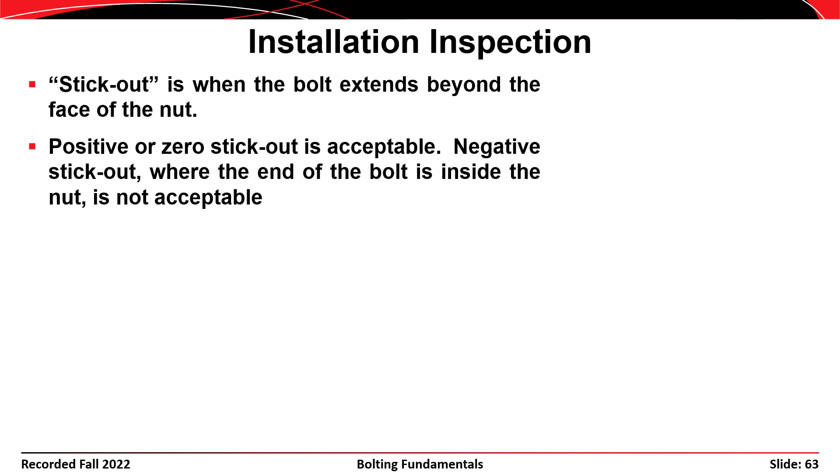The term 'stick out' sometimes comes up when discussing installation inspection for fasteners. Stick out is the amount of thread that extends beyond the face of the nut after the bolt has been snug tightened or fully tensioned. Some inspectors, engineers, or erectors have the misconception that thread must stick out beyond the face of the nut—that's not true. As long as the nut and the end of the bolt are at least flush, the fastener should perform adequately. You don't need a positive stick out; a zero stick out is acceptable.

The last thing we'll talk about is storage of components. Fastener components have to be stored so they're protected from dirt and moisture. Only fasteners anticipated to be installed in a given work shift are permitted to be taken out of protective storage. Protective storage is defined as continuous protection of the fastener from the elements, in closed containers or in a protected shelter. Any unused fasteners must be promptly returned to protected storage.

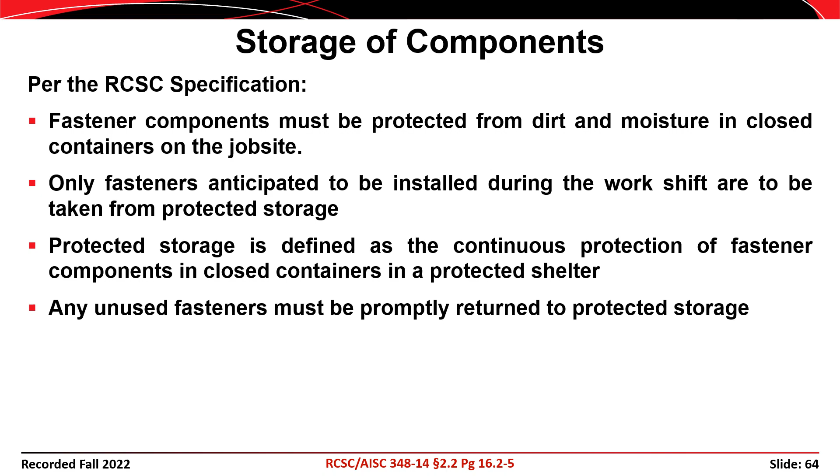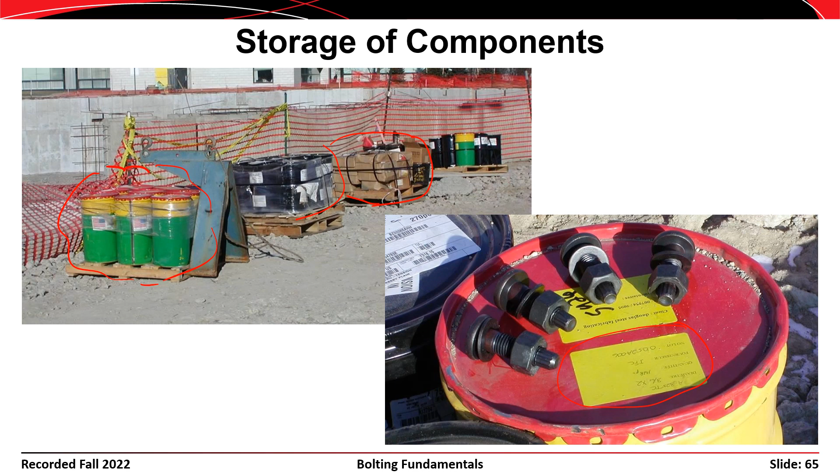This slide shows a close-up of one of the tags you would often find on a keg of bolts. In this case, we're dealing with A325 TC bolts. So the TC stands for tension control or twist off. They're 3/4 inch diameter, presumably 2 inches long, and there's 148 pieces in that particular keg. And it also gives the manufacturer's lot number so that you have traceability back to the testing that was done at the manufacturer, both with respect to strength and with respect to torque capacity for installation.

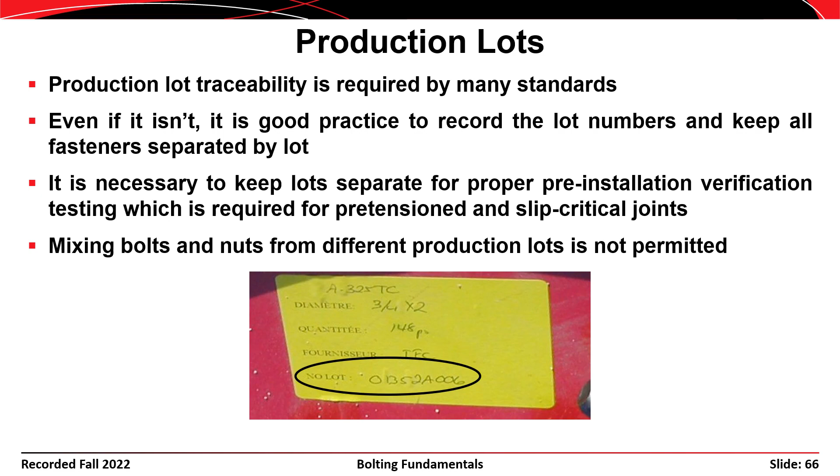Okay, lubrication to these fasteners is vital, particularly for methods that are torque-based, like the calibrated wrench method or the twist-off tension control bolt method of installation. The lubrication that's applied is often water-soluble, and this oil is easily washed off when they're exposed to the rain or the moisture.

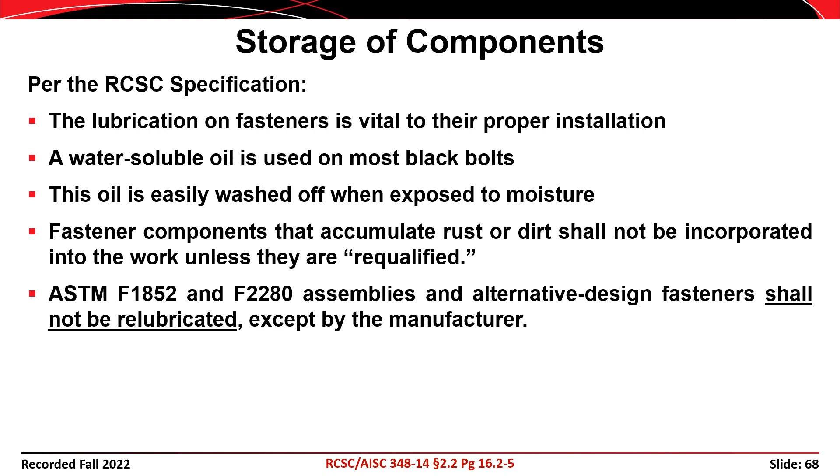But there's a provision in there that says that twist-off bolts F1852 or F2280 shall not be re-lubricated except by the manufacturer. You can actually get into trouble if you were to take a can of WD-40 or something like that and spray that on those bolts. You can end up with installation problems where maybe the bolt would start to strip off or something like that. And that shouldn't happen under normal conditions, but when you start playing around with re-lubrication, then that can be a problem.

And then here are some issues associated with the storage of galvanized bolts. Galvanized bolts are a little bit different in that sometimes you have over tapping of the nut so that you can allow more clearance between the threads of the nut and the threads of the bolt for the thickness of the galvanized coating. So in those cases you can get poor thread fit if you end up mismatching components from different assemblies. And it says that lubrication on galvanized fasteners is generally more durable than on black bolts, but

protective storage is still recommended. And as it stands right now, A490 bolts or 150 KSI bolts are not allowed to be galvanized. Overseas they are. In Europe you can galvanize the equivalent of A490s or F2280s, but in the United States right now you're not allowed to have galvanizing. Instead they have different coatings like a Dacromet coating that provides some weather protection for the bolts that's similar to what you would get from galvanizing.

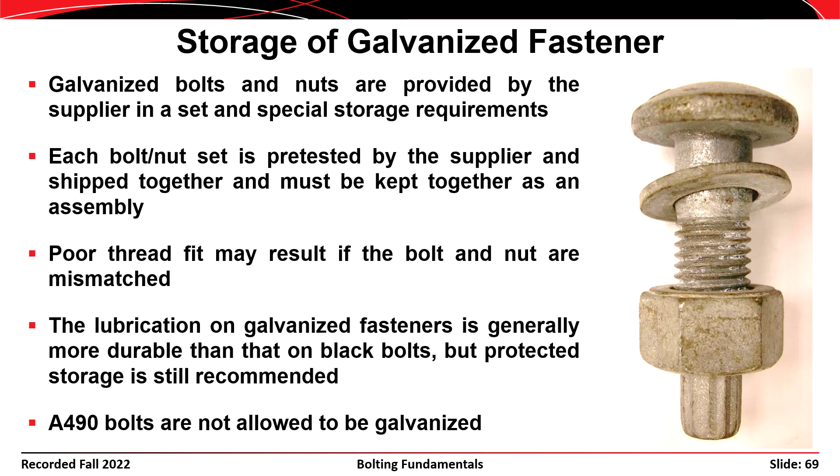Okay, so that brings us to the end of this presentation. At this point, you should have a good idea of which grades of fasteners are available and the 5 different methods of installation you would see in most common job sites. You could probably move on at this point to start looking at bolted connection fundamentals and then maybe move on to welding fundamentals and welding connection fundamentals.